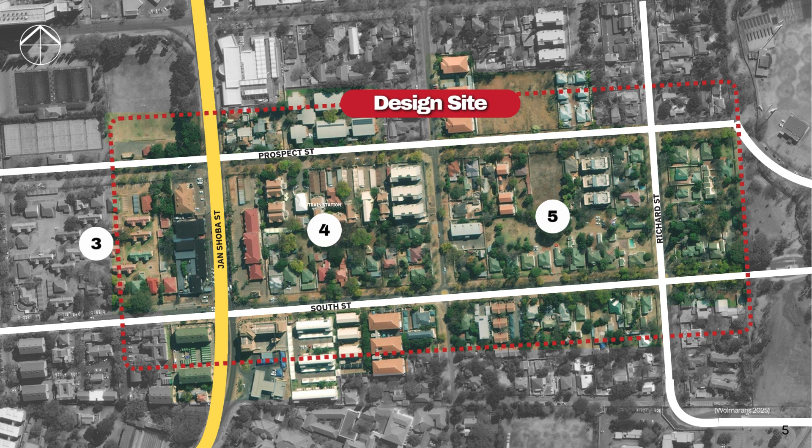Our team consists of myself, Robin, Matthew, Narissa, Kirsten, and Dante. As previously mentioned, our targeted context is within Hatfield, focusing on blocks 4 and 5 between Jan Shoba and UP Sports Campus. We focus on these 2.5 blocks as our site, while also exploring potential spillover into the surrounding area that maximizes the benefits of the proposal for the surrounding environment.

Our proposal acts to counteract key issues identified in the large group mapping, particularly the car-dominated nature of the area and heavy vehicular traffic along Jan Shoba Street, which hinder pedestrian movement and user experience. Hatfield also faces security concerns due to reported crime, necessitating interventions for improved security. Additionally, several public spaces are neglected or underutilized, presenting opportunities for revitalization.

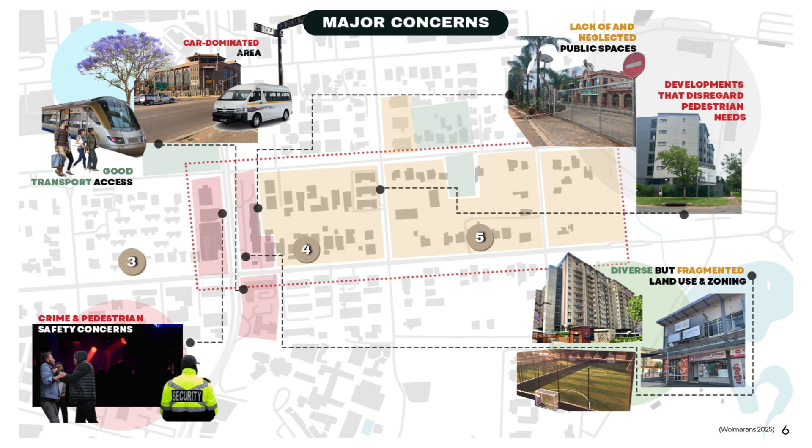While the area features diverse land use and zoning, their implementation appears fragmented and dispersed. Lastly, although high-density developments exist, many are enclosed by high walls, failing to engage with the street and diminishing the experience of the public realm.

In summary, it can be determined that Hatfield lacks a sense of place, leading to fragmented and impersonal urban environments. Despite its strategic location and proximity to the university, the area struggles with weak identity, poor spatial cohesion, and a lack of well-defined public spaces that foster social interaction, community engagement, and a sense of belonging. The absence of these qualities limits the area's potential to develop as a vibrant, inclusive, and memorable urban district.

The following section establishes the theoretical foundation for our proposal, shaping our design strategies and interventions. The literature read presented various strategies for successful urban planning. As the base of our framework, our proposal investigates how to define a strong sense of place for Hatfield, focusing on nature and an education-based identity.

To understand the sense of place, we investigated placemaking as an overarching theory. Placemaking is a human-centered approach to urban design that focuses on transforming spaces into meaningful, engaging, and socially vibrant spaces. It enhances both the physical and experiential qualities of space. In Hatfield, applying placemaking strategies can counter its transient nature by fostering a strong sense of place.

By creating various public spaces for gathering, recreation, and learning, the site can encourage community development and increase social interactions and connections. Through the promotion of economic diversity and providing necessary services, the site can provide economic value. And lastly, improved streetscapes, multifunctional plazas, green spaces, educational programming, and productive landscapes will strengthen cohesion and engagement ecologically. Ultimately, through placemaking, the site has the potential to evolve into a thriving, inclusive hub where people naturally want to stay, connect, and contribute.

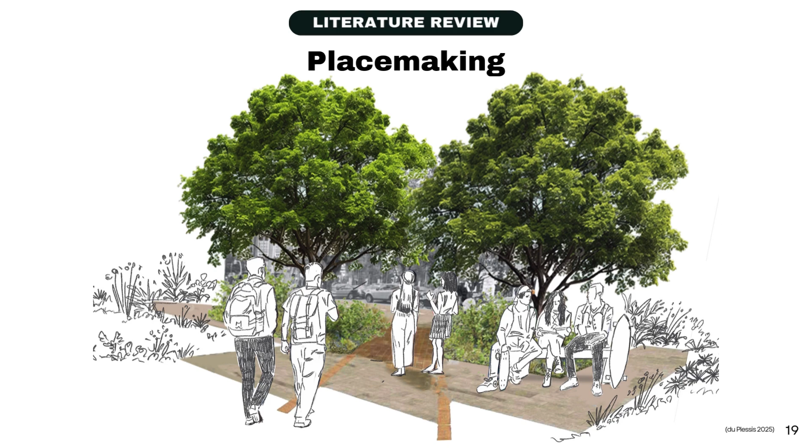After identifying our concerns, we identified these key strategies to address these 5 points. Our goal is to create a space with a distinct identity by incorporating both new and old buildings, using a variety of building shapes, colors, and programs, as well as adding landmarks that will help as wayfinding and act as points of attraction. We will address the lack of safety by providing better safety measurements, such as lighting, passive surveillance, and active facades.

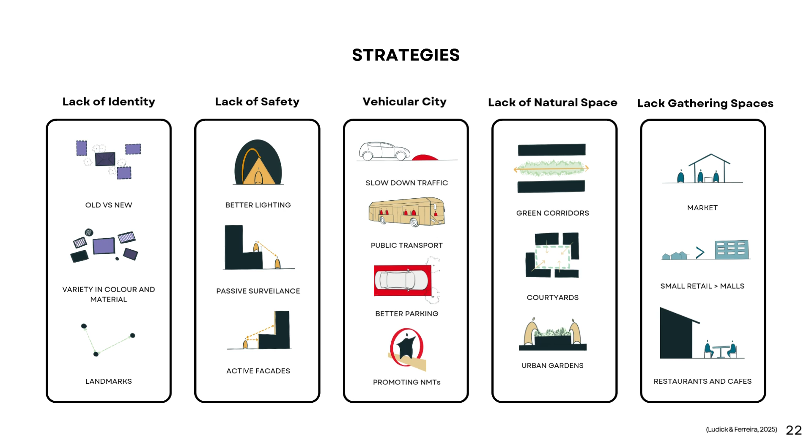We will address the lack of pedestrian design by slowing down traffic, incorporating public transport nodes, providing better parking solutions, and promoting non-motorized transport, allowing for more walkability on site. We will address the lack of natural spaces by incorporating green corridors, courtyards, and urban gardens. We will address the lack of gathering spaces by incorporating smaller retail spaces, as well as markets, restaurants, and cafes.

After identifying our key strategies, we identified 3 precedents that incorporate similar strategies into their design. By analyzing these precedents, we can identify how these strategies have been implemented successfully and how they can inform our decisions. These precedents were identified ranging in scale from macro to micro. For our macro scale, we identified Stellenbosch University in the Western Cape, Hazelwood in Pretoria for our meso scale, and Burnett Street in Hatfield for our micro scale.

On a macro scale, we analysed Stellenbosch University in the Western Cape. Its campus layout and integration into the surrounding city provided valuable insights into how we can approach the expansion of our own city campus model. By studying its spatial organization, connectivity, and urban relationships, we can extract key lessons for our design.

One of the key strengths of Stellenbosch is the relationship between the campus and the greater town planning. Stellenbosch campus incorporates several strategies that allow for a seamless integration between town and gown. These strategies include the incorporation of green corridors, transport routes that connect important nodes, the balance between heritage and contemporary architecture that adds to the character of the space, as well as the diversity in building typology and architectural language. The town's active nightlife and pedestrian-friendly design creates a vibrant and engaging environment.

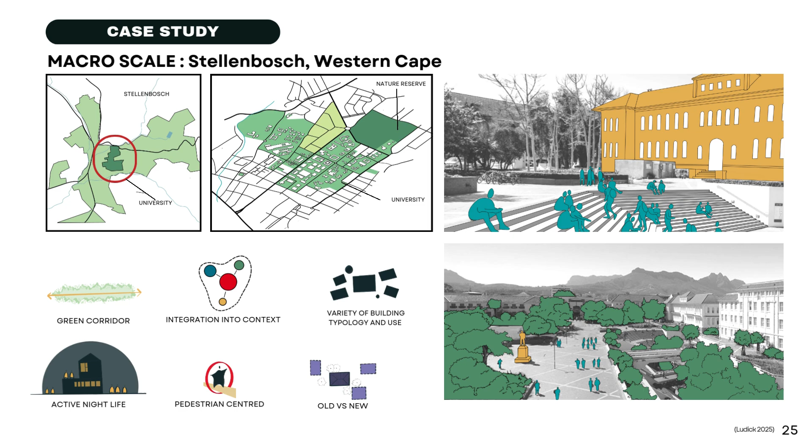On a mesoscale, we examined Hazelwood in Pretoria. Hazelwood is a mixed-use neighbourhood that blends commercial, residential, and social spaces. By analysing its design strategies, we can explore how similar principles can be applied to our design approach. Hazelwood seamlessly combines aspects of urban and suburban design. Hazelwood serves as a landmark and a point of attraction for surrounding neighbourhoods.

The incorporation of small-scale retail supports local businesses and creates a more intimate and community-driven atmosphere. Hazelwood has a strong sense of place by incorporating a variety of design aesthetics achieved through the combination of new and repurposed buildings, as well as different materials and building uses. By incorporating traffic calming strategies, Hazelwood creates a safer and more pedestrian-friendly space.

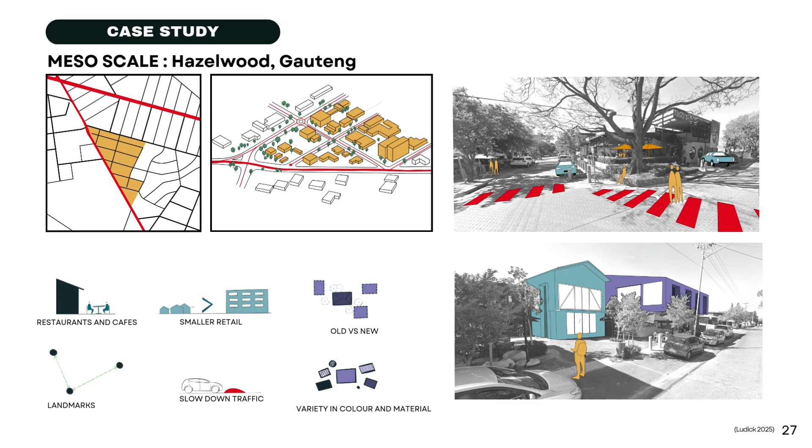At a microscale, we selected Burnett Street in Hatfield as a precedent. Burnett Street is a very active space with a constant flow of pedestrian and vehicular traffic. By analysing Burnett Street, we can identify how it addresses the relationship between the people and their environment. Burnett Street is a mixed-use space and incorporates a variety of programs along the street's edge that ensures continuous activity throughout the site. The diversity in building sizes and forms adds to the dynamic urban fabric.

Burnett Street serves as a node for public transport such as taxis and buses. This enhances the overall connectivity and accessibility of the site. Additionally, parked cars act as buffering between pedestrian and moving traffic, improving the overall walkability and safety of the site.

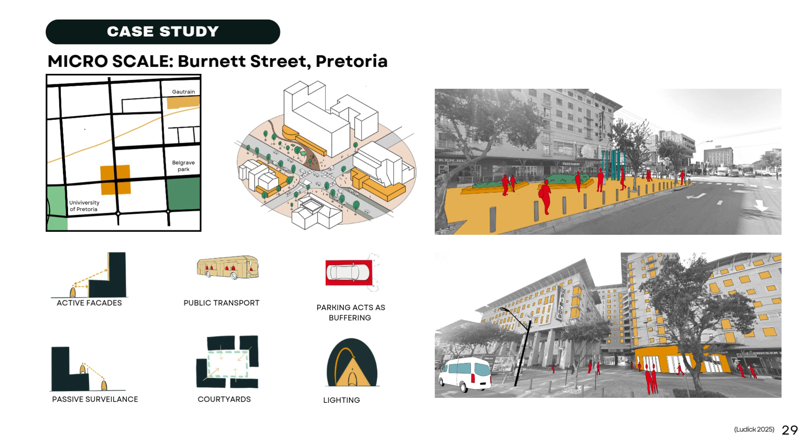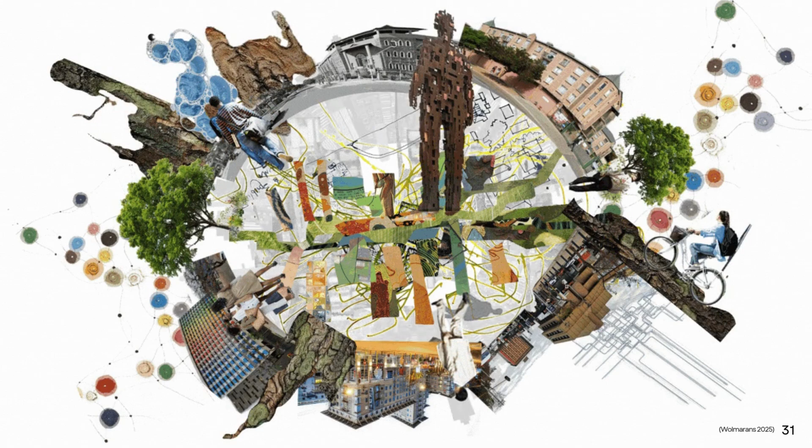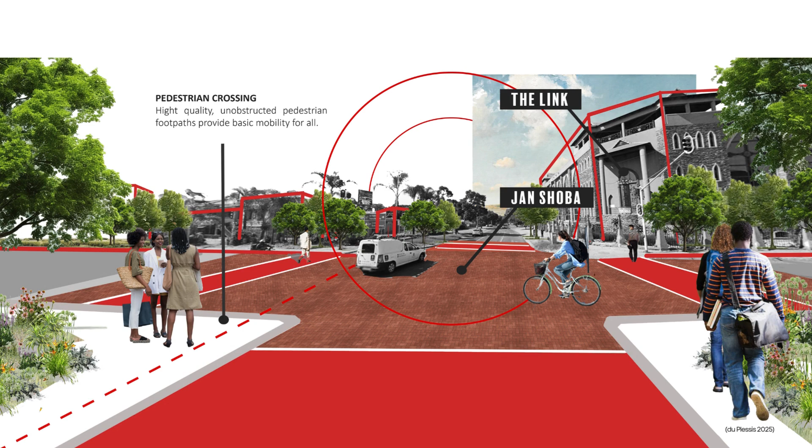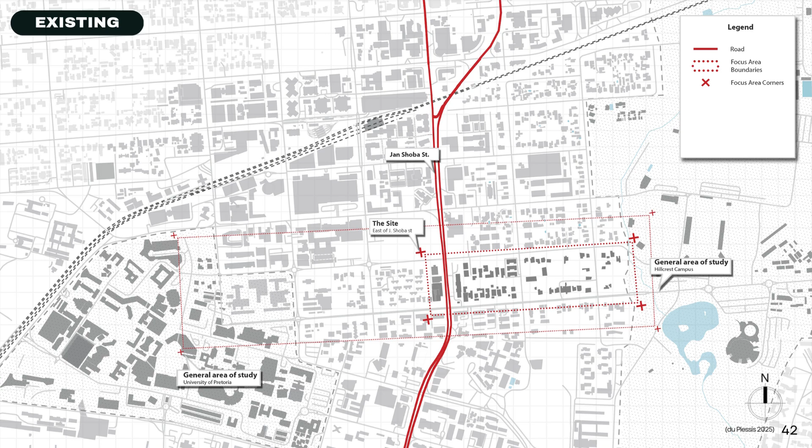The master plan aims to respond to the larger context of Hatfield, identifying opportunities and proposing strategies focused on transport, landscape, and public spaces. The general area of focus is located between the two campuses, with Jan Shoba as the main road of vehicular transport running through the area. The site of our urban intervention is situated east of Jan Shoba, touching Hillcrest campus.

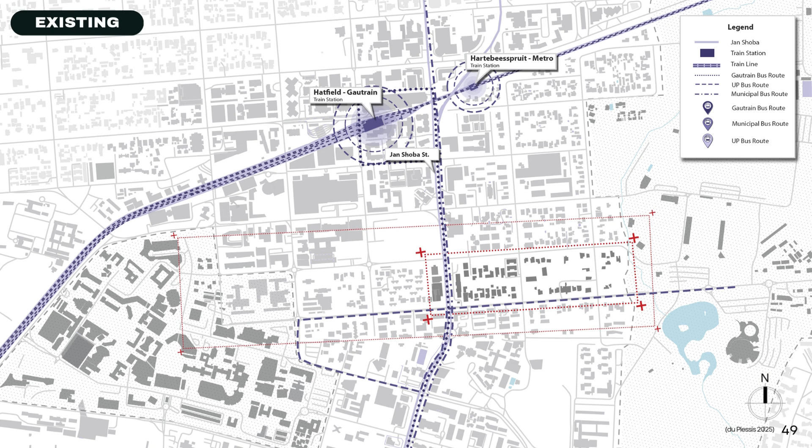Starting with the transportation strategy, Hatfield is served by a railway line, with Gautrain and Hartebeespruit metro station as the key drop-off points. University buses connect the campuses, while the Gautrain and metro buses run along Jan Shoba, with bus stops placed all throughout. However, the metro currently only has an exit to the north, lacking easy access to the south. Our transportation strategy proposes a new metro exit to the south with a bus stop, a public transport node along Jan Shoba, and a bus stop at Hillcrest campus entrance. A new bus route will be connecting the metro directly to the site, improving accessibility.

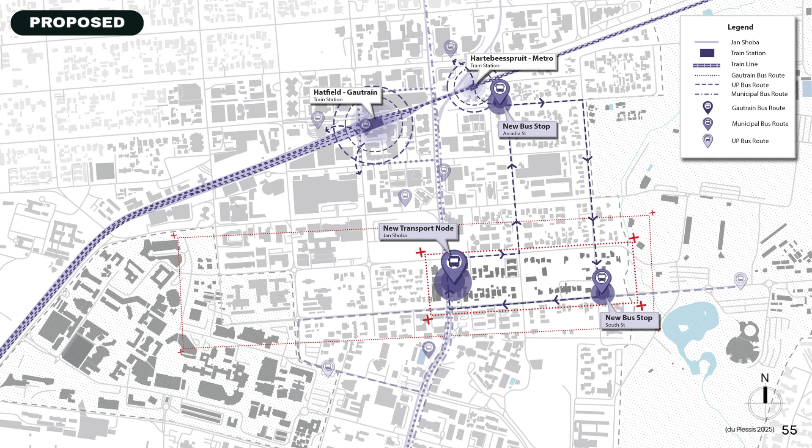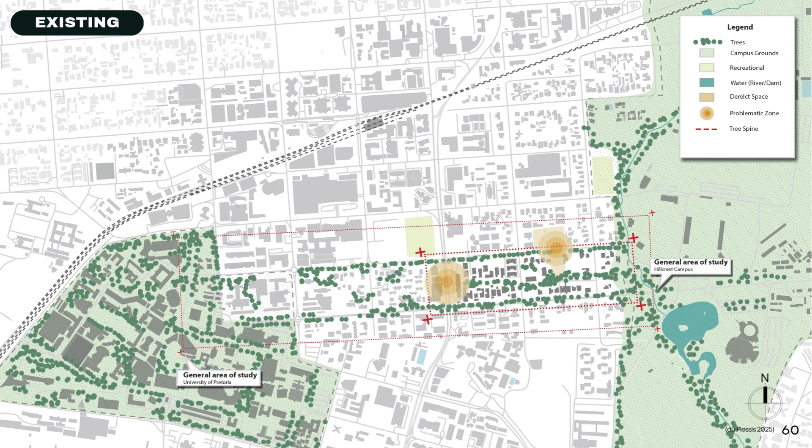Moving on to the landscaping strategy, the main challenge is connecting the two campuses, with Hillcrest being the primary source of green spaces. Problematic zones such as derelict areas and concrete islands interrupt green corridors. Our landscaping strategy begins with expanding the greenery from Hillcrest campus to create a public park. We propose transforming derelict spaces into green areas and extending the tree line, bridging the gap, and creating green corridors linking the campuses.

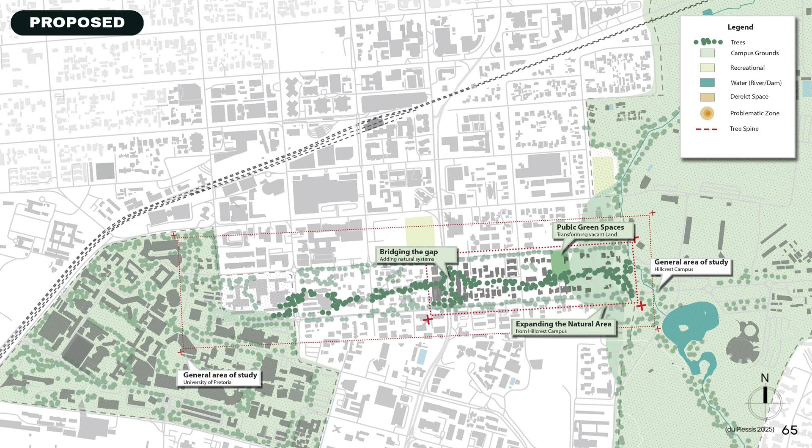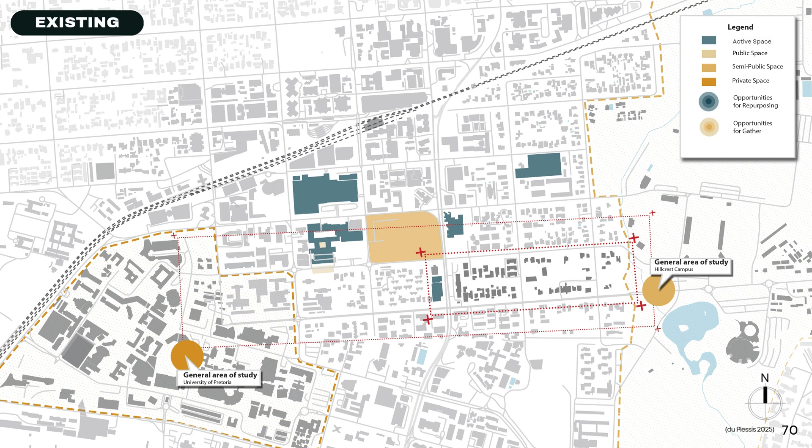For the public space strategy, currently public spaces are fenced off and have restricted access. While there is an abundance of activity spaces like shopping centres and restaurants, they all require spending money to enjoy. The transportation and landscaping strategies overlap with the public space strategies. The proposed public transport node, the public green spaces, and the extension of Hillcrest campus create opportunity for new and accessible public spaces.

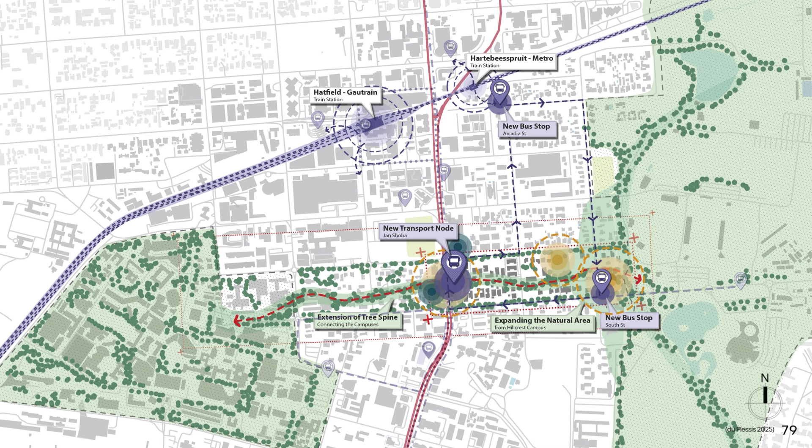By combining our transport, landscaping, and public space strategies, we envision 3 main nodes on the site: a public transport hub on Jan Shoba, a new central open space, and an extension of the Hillcrest campus that will be open for the public to enjoy. We will then tackle our proposal for the mesoscale.

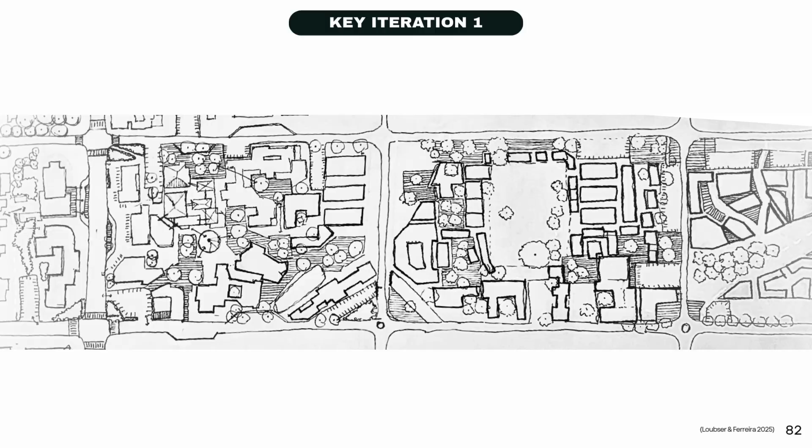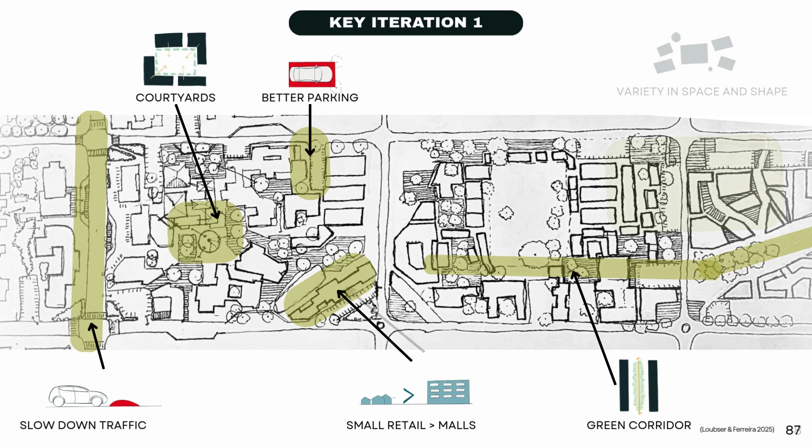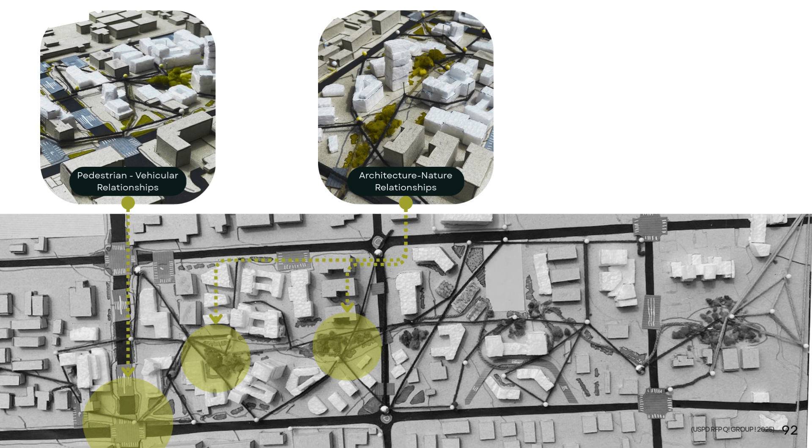Interventions such as traffic slowing measures were introduced at Jan Shoba Street to cater for the high pedestrian traffic and create safer pedestrian conditions. Deriving moments where there's a good dialogue between the architecture and natural landscapes, these being realized in our proposed green corridors. Furthermore, we developed strong moments where the relationship between the user and natural landscape or infrastructure was solid and interesting. Our second iteration involved strengthening the ideas that worked and working on the ideas that were weak.

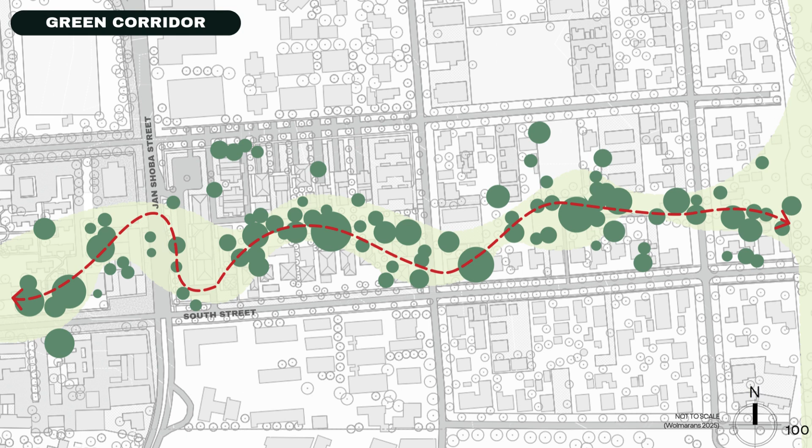Our architectural strategy was developed at a mesoscale while using the site plan's axiality and zoning. Our first informant was the existing tree line with their prominent canopies. This naturally formed a spine or artery that traversed through the site. This would form our primary green corridor through the site, connecting the two campuses. Following this, we branched outwards from the central spine to our entry points into the site, as well as other nodes in or bordering our site.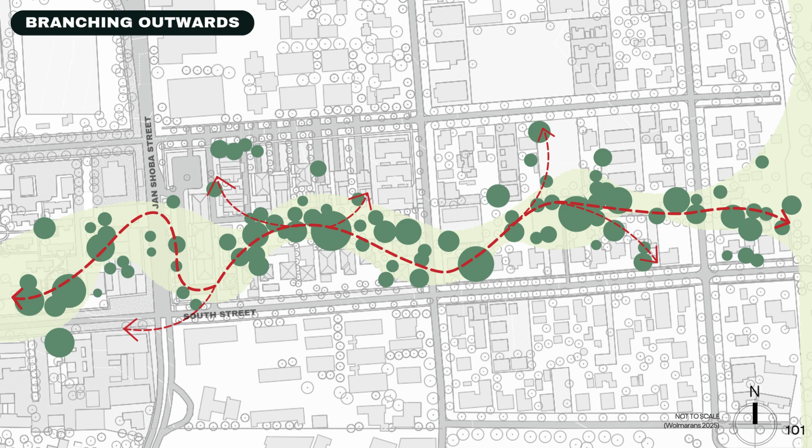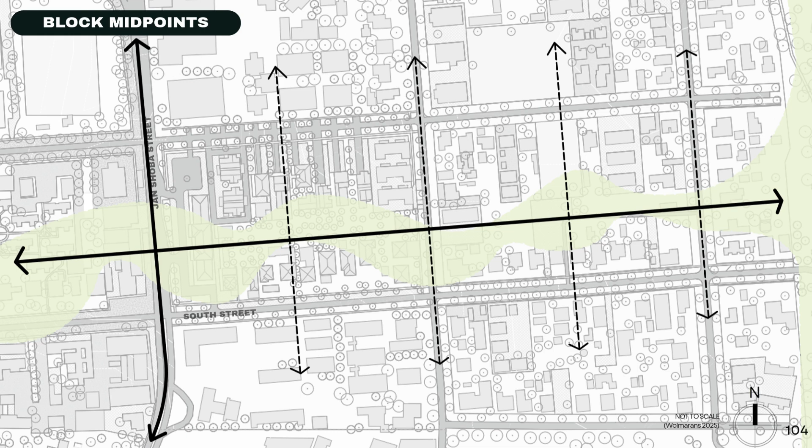To simplify this diagrammatically, our plan is dictated by the central natural spine. This spine is cut by the prominent roads that pass through the site. We divided the big blocks into smaller sub-blocks by creating secondary circulation routes. It was then about connecting existing and potential densities that border our site.

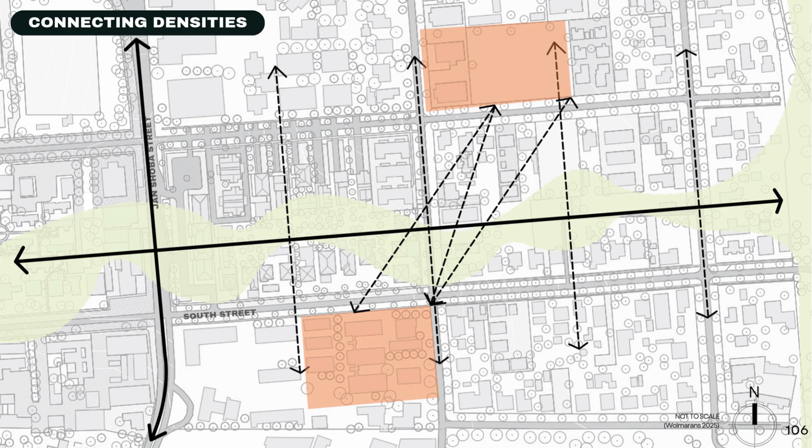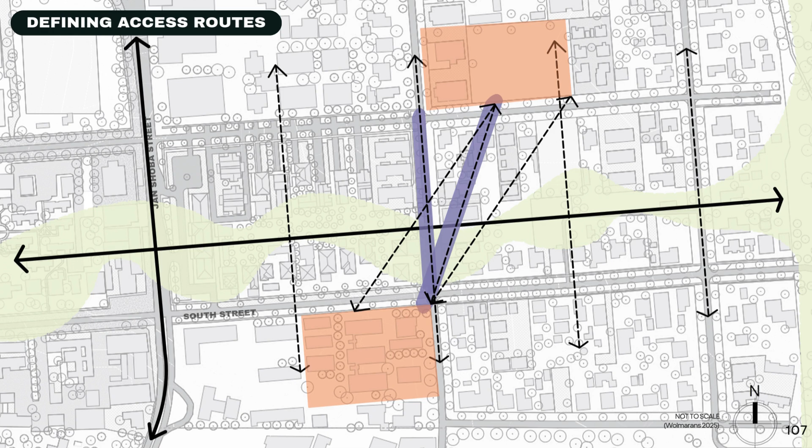These connections form strong diagonal corridors or streets across the site. We agreed that one should be a more pedestrian-orientated street, the perpendicular one, whilst the other, the diagonal one, functions as an access road into the site, only used when emergencies occur. We then created more walkways by connecting the midpoints of the blocks to their corners.

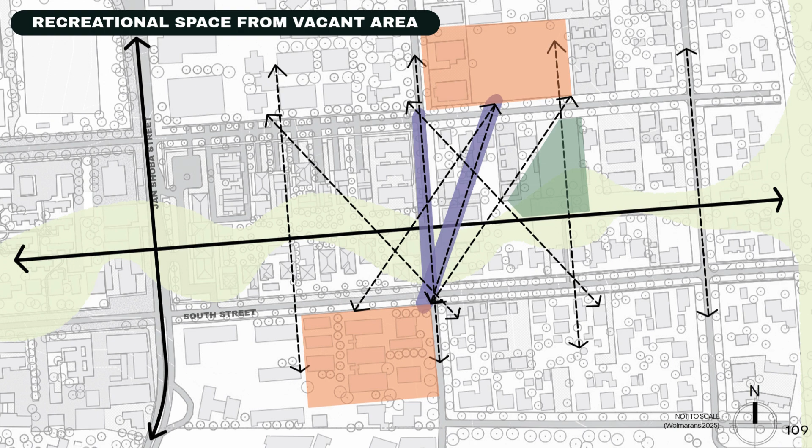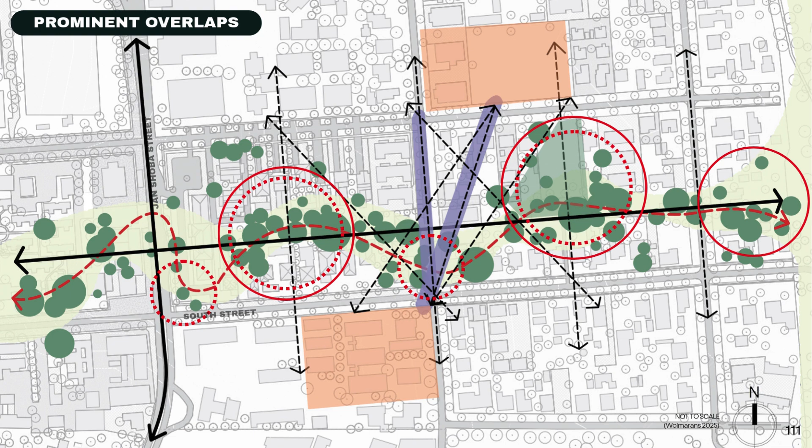We integrated the existing open green space into our proposal, transforming it into an urban agriculture community park. All these informants overlaid gave us this plan, which would inform us as to where our building footprints would be found and their relationships to these guidelines. Using this plan, we could identify where major overlaps or junctions occurred.

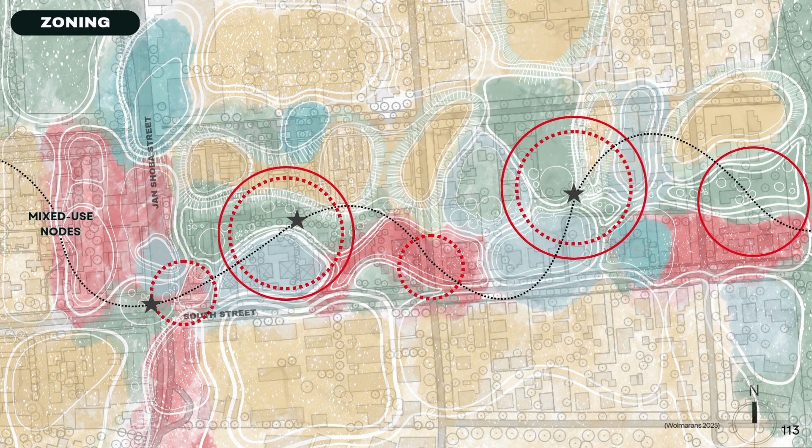The zoning diagram led to the block east of Jan Shoba Street being a more high-density urban block, and the second block leading to LC de Villiers, characterized by its more neighborhood, low-density condition. The buildings would consist of diverse dynamic building typologies and functions that could facilitate the revitalization of the area and create vibrant streetscapes.

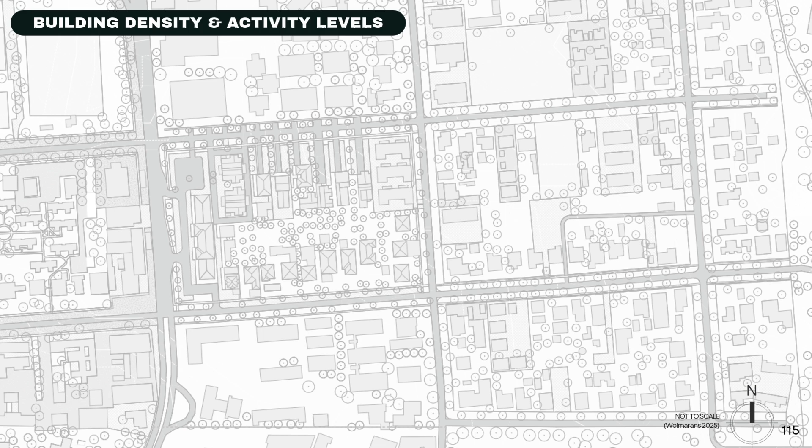Our proposal embraces densification to accommodate Hatfield's growth while avoiding a canyon-like effect by carefully stepping densities. This ensures high-density areas do not overpower low-density ones, preserving the user urban experience. Additionally, the program transitions from high-density, high-activity public areas to calmer, lower-density public areas.

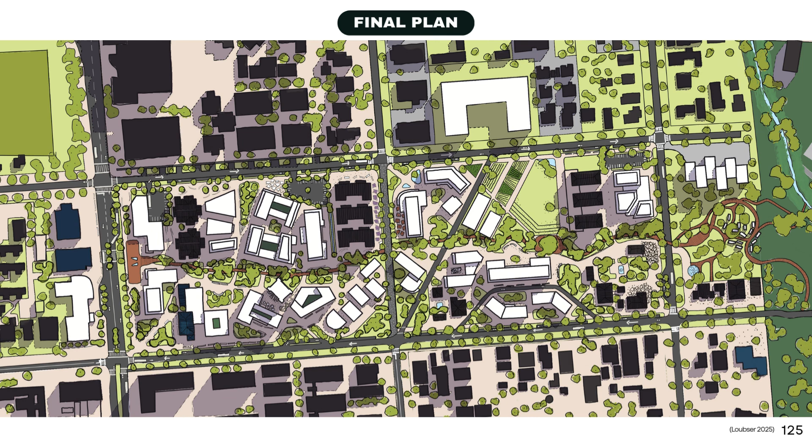Our final major iteration addressed the issue of the second block by giving it its own character, yet tying in with the proposal strategies regarding placemaking through gathering spaces. Thus, we developed our proposal into a final design resolution. Breaking down the overall design, we started by identifying existing buildings that we are keeping.

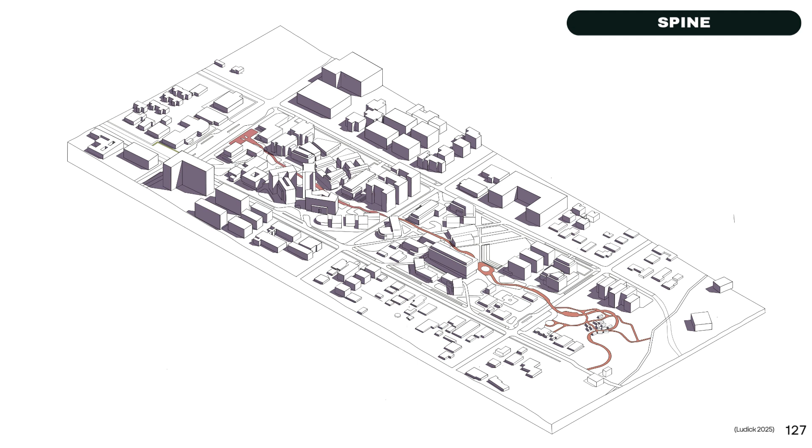We identified the spine that would be running through the site. The spine was informed by the green corridor. It would serve as a pedestrian highway, creating a connection between the two ends of our site. We also identified vehicle and pedestrian routes, informed by spatial arrangements and building masses.

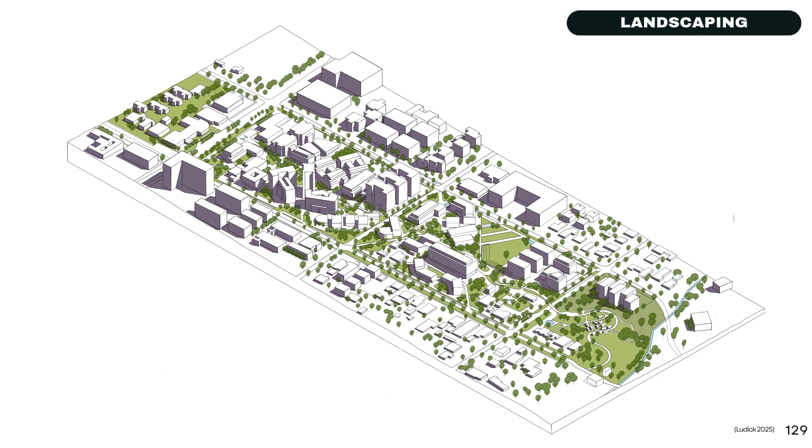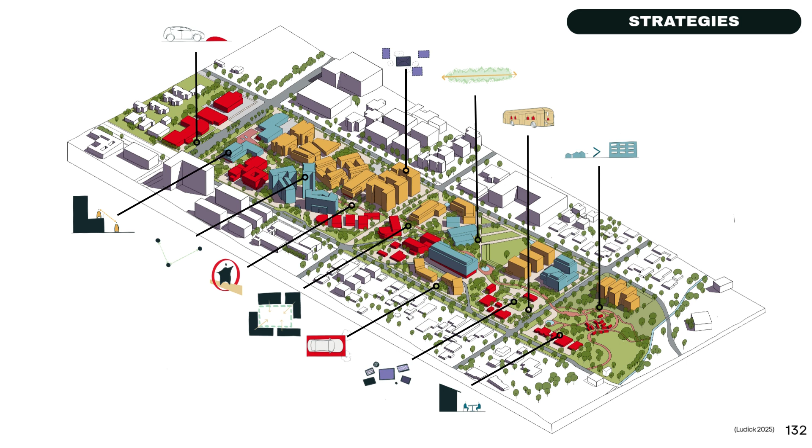We created green pockets of different sizes throughout our design, creating a variety of spaces and experiences for the users. We also assigned different building programs throughout our site, creating a variety of uses that would draw a wide variety of people. The overall synthesized plan, indicating the implementation of strategies on the site. We took sections through the site to indicate massing.

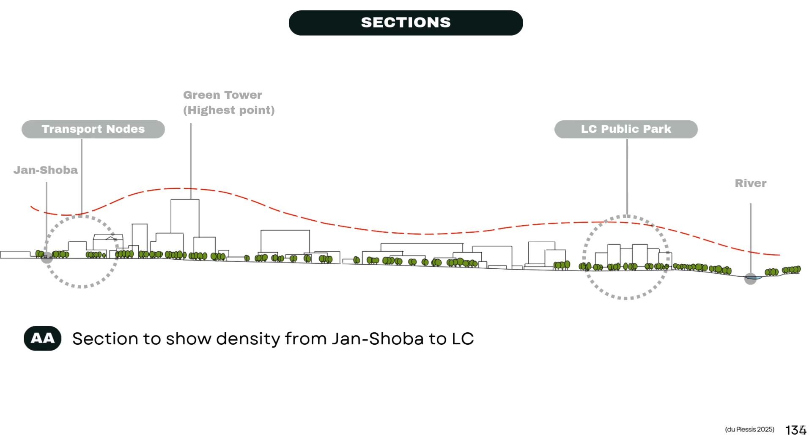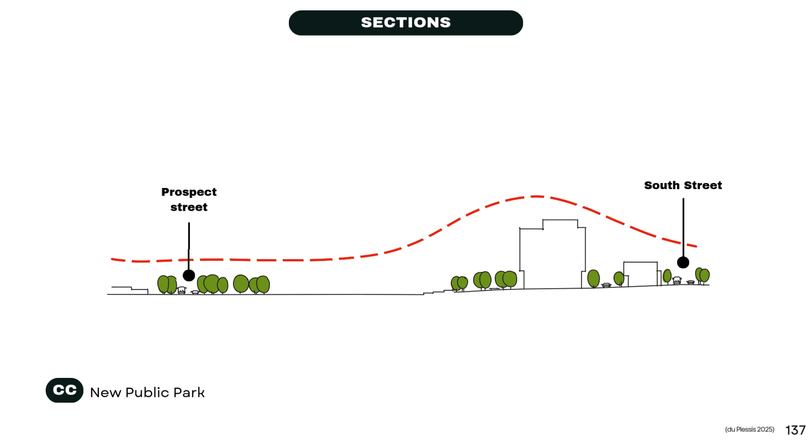This section through the site shows the density of the proposal from Jan-Shoba to Hillcrest campus. The density is higher close to Jan-Shoba and starts to lower in density towards the river. Buildings range between 4 and 10 stories at the high density part of the site, with the lower density existing buildings on the site being kept at 1 story.

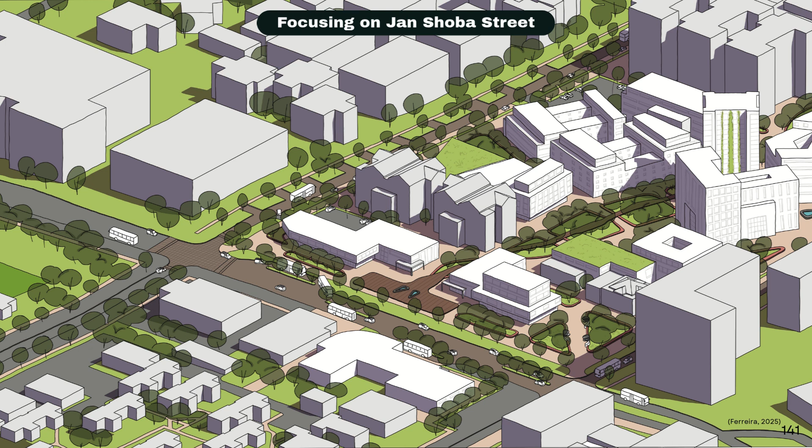Looking at the infrastructure strategy for transport, we focused on Jan Shoba Street. To make this transient space more pedestrian-friendly, the traffic at Jan Shoba has been slowed and pedestrian movement has been prioritized. A transport node was added to the site for buses and shuttles to park. Bus stops are integrated on both sides of Jan Shoba, creating safe and convenient access to the site.

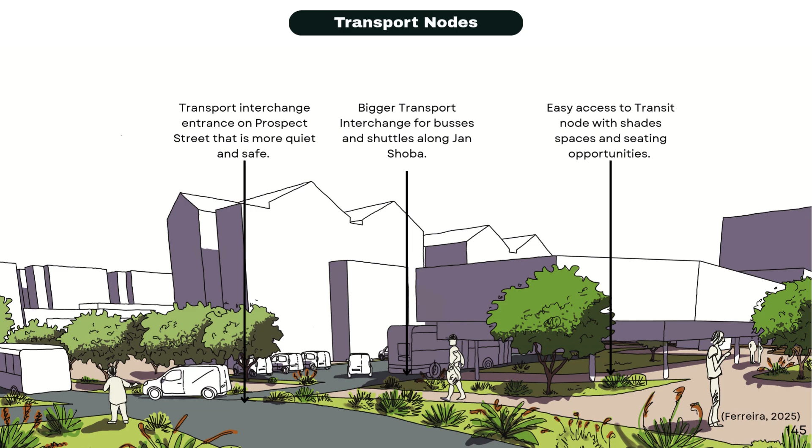By adding raised pedestrian crossings and changing the road material, the traffic is slowed down. Sidewalks are made wider with the green buffer separating the road and sidewalk. Green islands between lanes create shorter walking distances for pedestrians. The public spaces strategy can be experienced with perspective views.

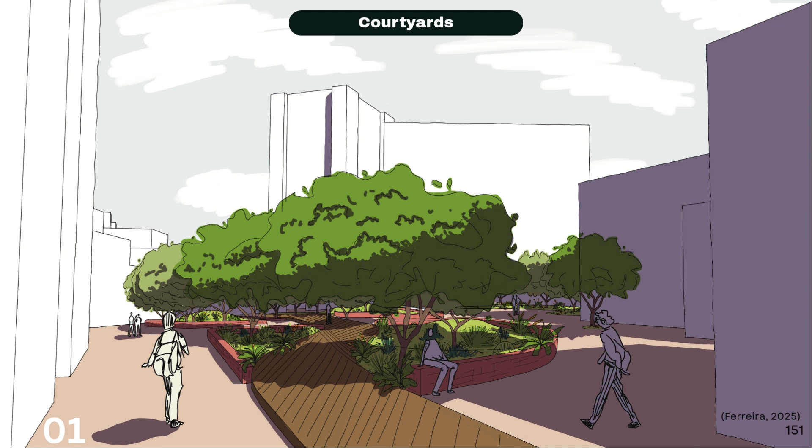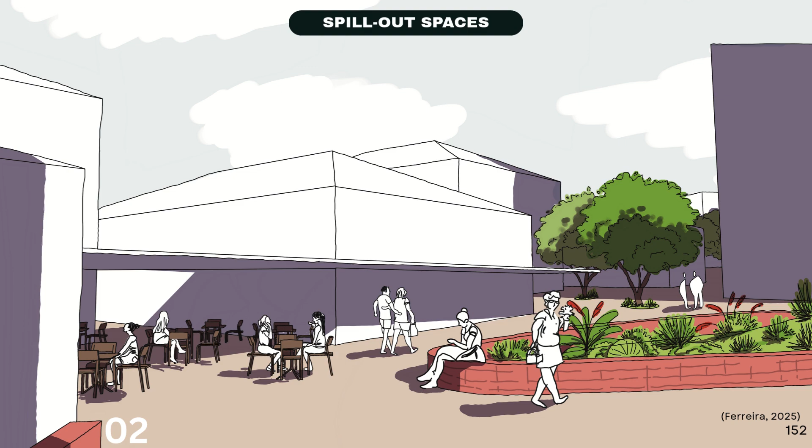Courtyards are defined by building shapes with the spine, or wooden walkway, running through the space with planters that can function as seating. People can move through the space using the spine or paved spaces between buildings. Paved areas outside buildings allow for spill out onto the public spaces, activating these courtyards with cafe seating or markets.

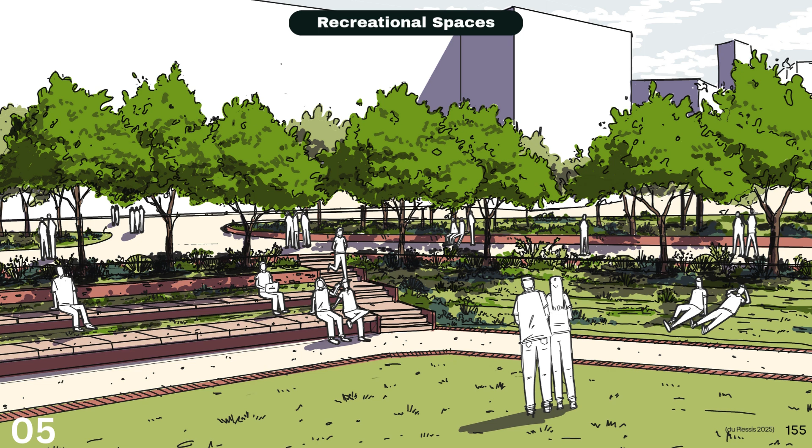The community gardens allow people to engage with the site, exchange knowledge, and use the produce in nearby restaurants. The public park allows people to use the space as they wish, enriching the multifunctional site with diverse activities. Lush green spaces with the integrated spine walkway create serene shaded spaces within the urban landscape. The varying thickness of the walkway creates spaces for users to rest or converse.

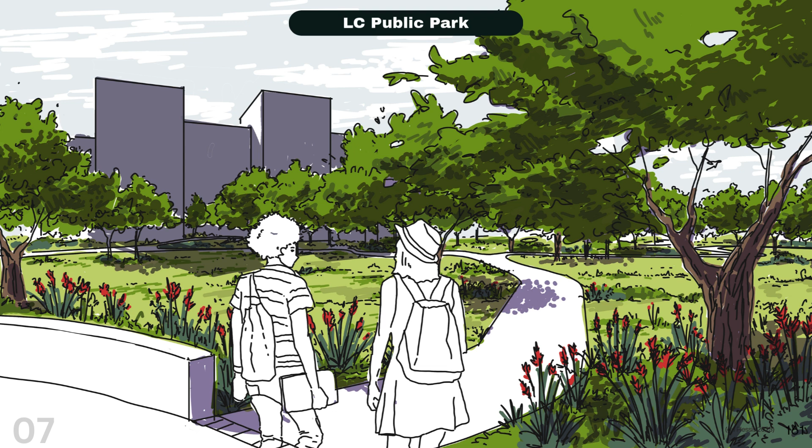The LC Public Park connects Hillcrest campus with the rest of the proposed site, creating a calm space with meandering pathways between workshops and small retail stores. In conclusion, currently the site is underutilized, lacking a cohesive identity and struggling with transients, fragmented spaces, and an imbalance in density distribution.

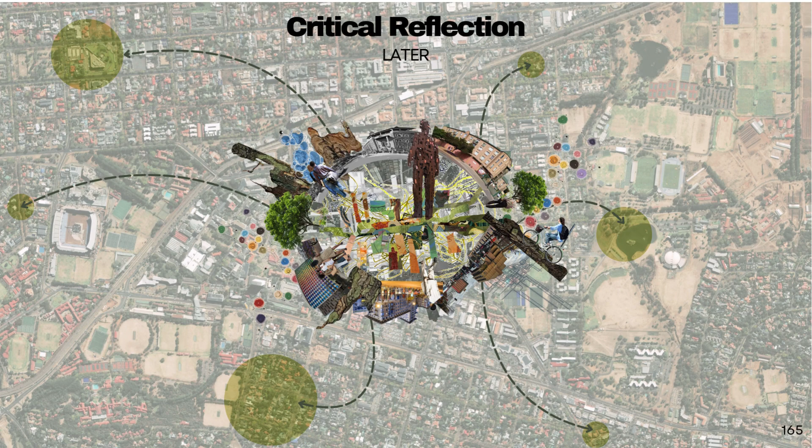Incremental development led by the university can bridge the campus with its surroundings, introducing pedestrian-friendly streets, vibrant public spaces, and gradual densification to enhance the area's livability. Over time, this precinct can become a model for sustainable urban growth in Pretoria and beyond, demonstrating how thoughtful densification, placemaking, and community-driven design can transform urban environments into inclusive, dynamic, and enduring spaces.

Reflecting on the process, this proposal is a strong first step toward improving Hatfield, balancing potential with real-world challenges. While not perfect, it reflects key lessons that will refine future projects and shape our evolving design approaches. And as always, collaboration proves that diverse perspectives create better outcomes.